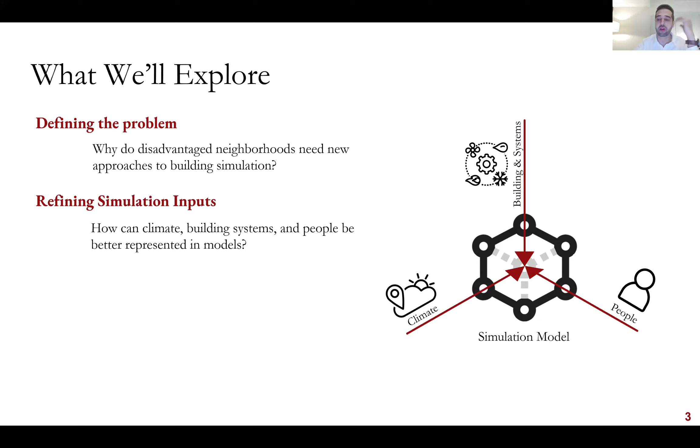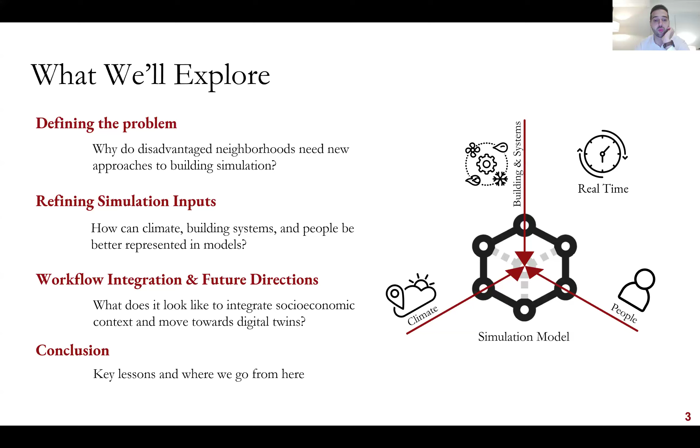But what are we going to be talking about today? We're going to first start off by defining the problem. Why do disadvantaged communities or neighborhoods need new approaches to building simulation? Then we'll talk about pathways for refining simulation inputs for those communities on the axes of climate, building systems, and people. We're going to be talking about how we can integrate different workflows and develop future directions for how we represent disadvantaged communities in simulation models. And finally, we're going to be concluding with key lessons and where we go from here.

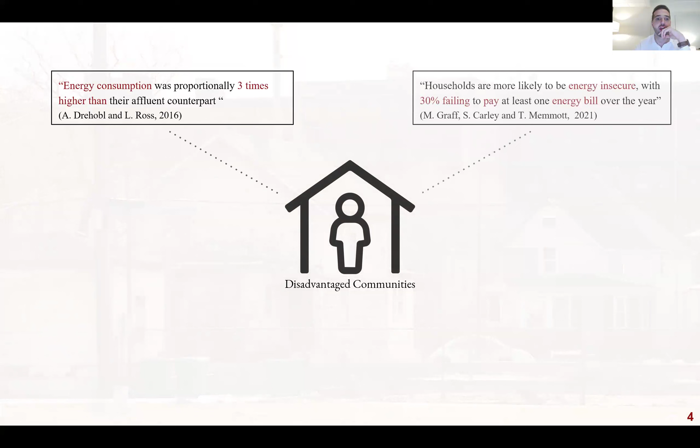So why do disadvantaged neighborhoods need a new approach to building simulation? While there's been significant work on improving energy efficiency in the built environment, specifically for households and residential structures, disadvantaged communities are currently in a worse situation. Energy consumption was proportionately 3 times higher than their affluent counterparts in those disadvantaged communities. Individuals were more likely to live in older, energy inefficient buildings. They're more likely to be energy insecure, and elevated electricity consumption was attributed to the design and construction of the households in which these disadvantaged communities live.

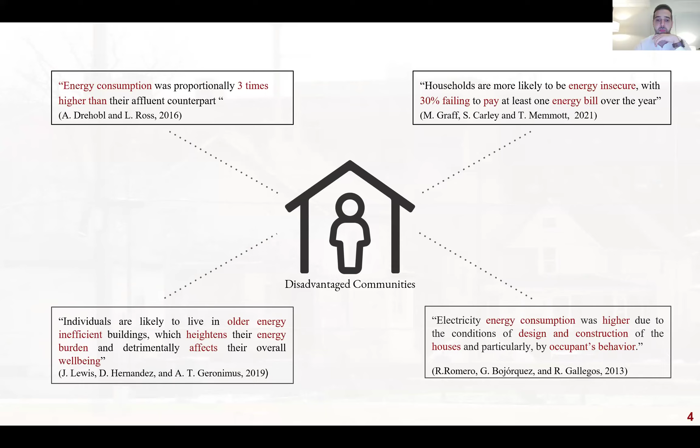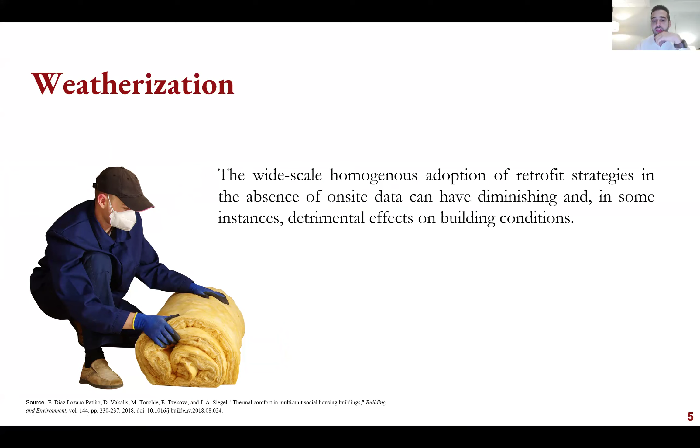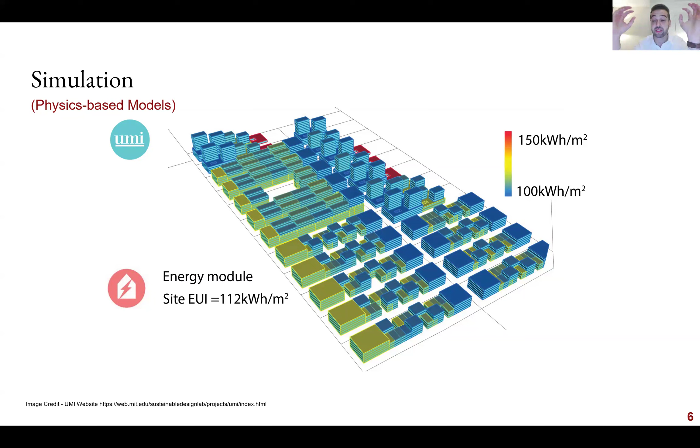And while weatherization becomes a tool for us to improve the energy efficiency of those communities, there's an issue that we face when we apply wide-scale adoption of those retrofit strategies in the absence of on-site data. As we have seen in the literature, such a homogeneous adoption of strategies can have diminishing and even in some instances detrimental effects on building condition. And this is where usually simulation comes in. Throughout this webinar, I'm going to be discussing more the applications for physics-based simulation models. They have a lot of applications in terms of analysis of energy consumption, optimization of system design, cost and life cycle assessment, and retrofit and renovation planning.

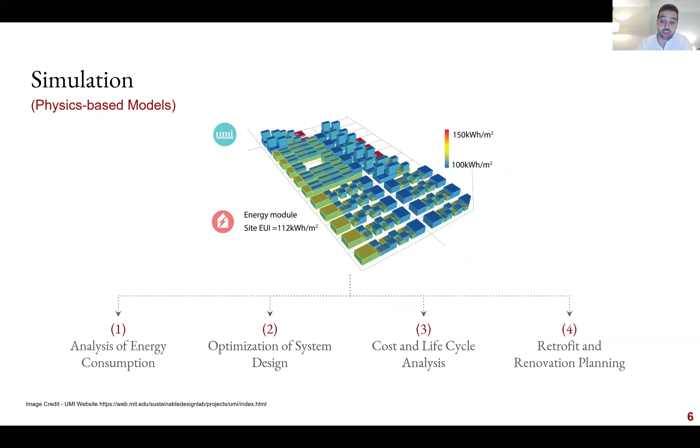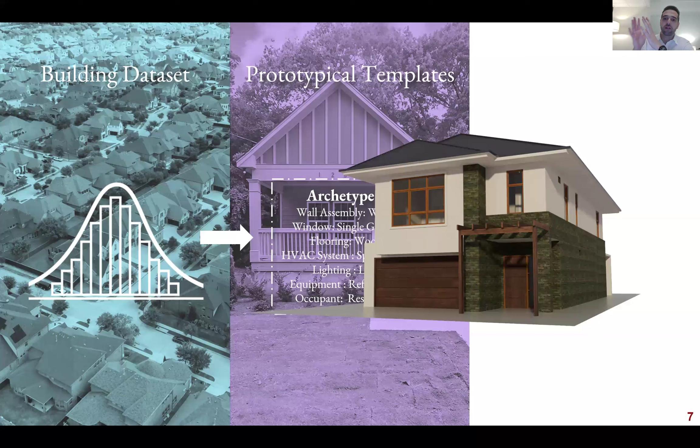And if we look at the typical process, we start off with a building data set. And from that building data set, we have a distribution of buildings with their specific characteristics. Now, in typical simulations, we start off with that data set and we start to build or construct prototypical templates. This could be for BEM or UBEM models. And these templates encompass a lot of information that we have about the building, things like the wall assembly, the windows, the flooring, HVAC systems, lighting equipment, etc. And then we feed that prototypical template into our simulation model.

But if we're looking at what the issue is with the disadvantaged communities, it is that while these prototypical templates are constructed based on the majority of the distribution, disadvantaged communities are the outliers of those distributions, meaning that the archetypes or templates that we do produce do not capture the characteristics of those homes quite accurately.

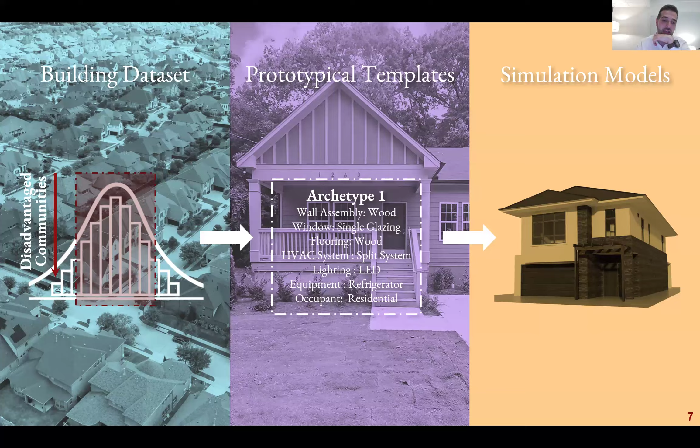And the results of this are that we can see up to a 92 kilowatt hour per meter square per year difference in EUI between simulated and actual energy consumption in some instances. So what this highlights is there's a need for us to carefully inspect the model fidelity in such instances. And model fidelity here represents the degree to which the model or simulation reproduces the state and behavior of the real world object.

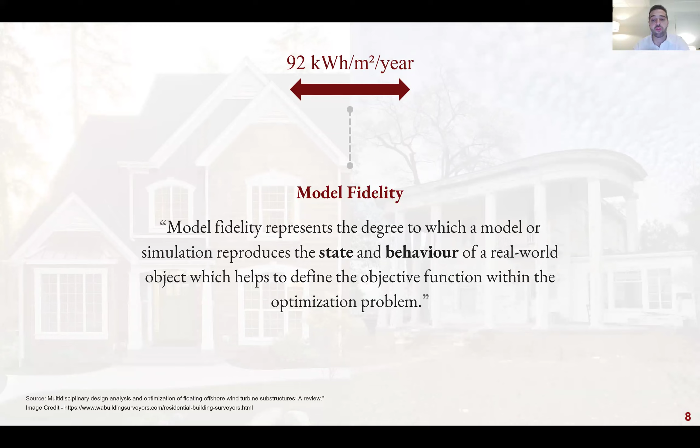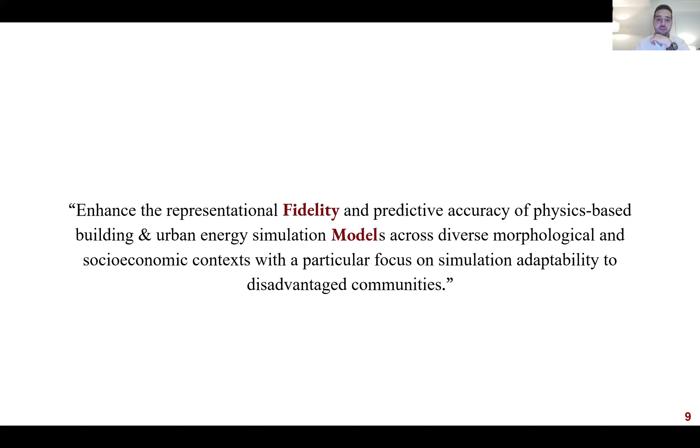So a clear objective that we need currently, specifically for disadvantaged communities, is for us to enhance the representational fidelity and predictive accuracy of physics-based building and urban energy simulation models, and specifically make sure that it is applicable across diverse morphological and socioeconomic contexts, with a particular focus on disadvantaged communities.

And in the field of architecture now, we've reached a state where we have a clear understanding of the boundaries of what it means to have inclusivity in architecture. And what this next step allows us to do is to move from inclusivity in architecture towards more inclusivity in building performance simulation. And what do we mean?

For this specific webinar, what we mean by inclusivity in building performance simulation involves the integration of diverse perspectives, needs, and conditions within the modeling of building systems and energy performance. And the key objective is that we want to ensure that the benefits we're seeing from things like simulation, from all of the tools, even advances in weatherization, become more equitably distributed to marginalized and underserved communities.

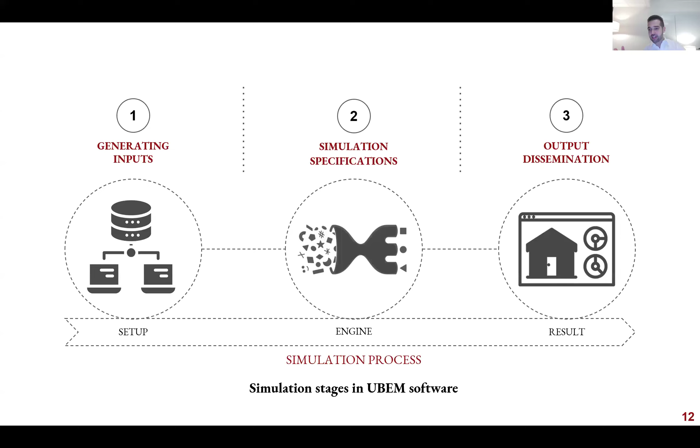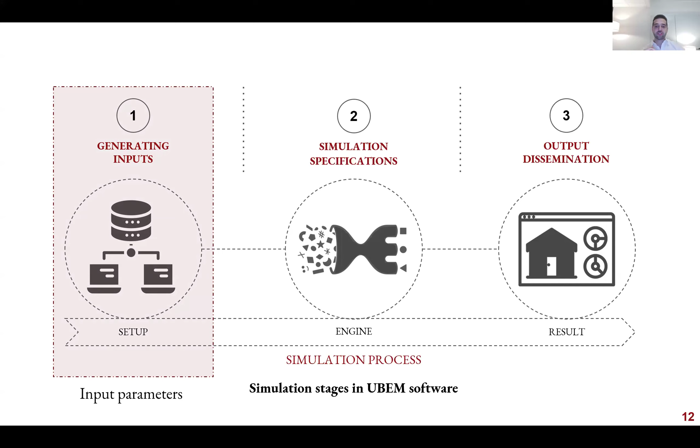So in terms of research questions that we all need to consider, first off, what are the key obstacles and challenges hindering the calibrated integration of disadvantaged communities into physics-based and urban energy simulation models? Secondly, throughout the simulation process, from the setup where we're generating the inputs, to the simulation specifications, to the outputs for a specific simulation run, we need to critically analyze the type of inputs that we're generating for the prototypical templates for these disadvantaged communities. So the second question could be, how can the simulation fidelity be enhanced to produce more representative outputs for BEM and UBEM simulations?

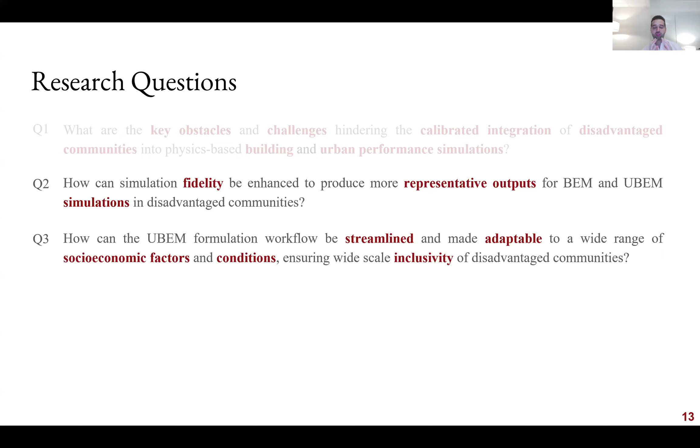And how can the formulation workflow be streamlined so that it becomes more adaptable to a wide variety of socioeconomic factors and conditions, meaning that we can apply the streamlined workflows in a lot more contexts?

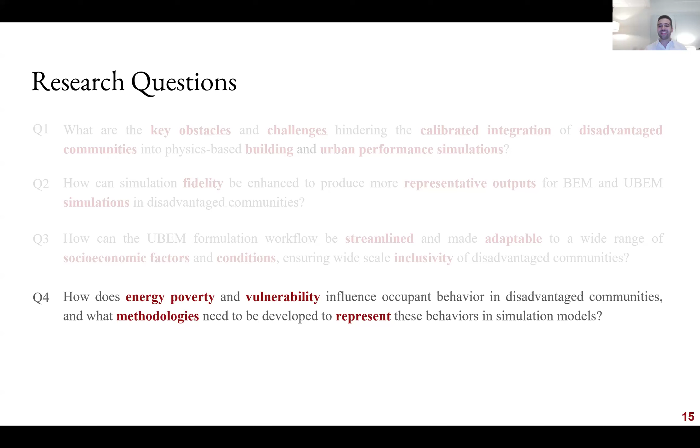One key thing that we have been missing right now in building performance simulation is the representation of the influence of socioeconomic factors on physics-based simulation models. Currently, there are a lot of instances in practice where we use a singular representation of occupant behavior. But a multifaceted occupant characterization is often required, specifically for disadvantaged communities. So here arises the question of how energy poverty and vulnerability could influence occupant behavior in disadvantaged communities, and what methodologies we need to develop to represent such behaviors in the future.

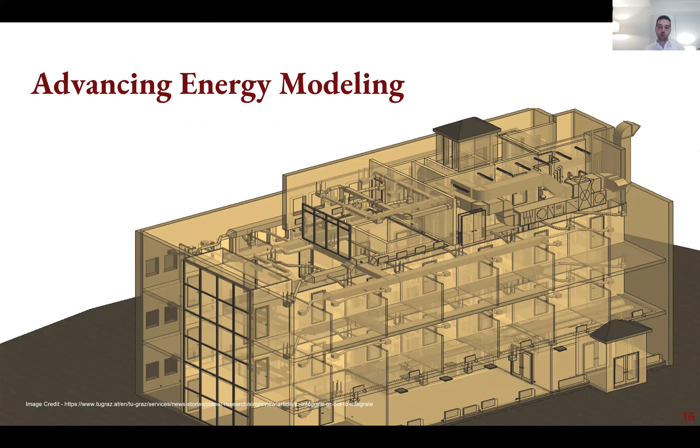And finally, if we're talking about equitably distributing the benefits of technological advancements for everyone, how can we use the forefront of what is being worked on, namely digital twins? How can we integrate current energy models for disadvantaged communities to work towards digital twinning, so we move from a snapshot model to more of a real-time updated model? So the last question would be, how can digital twinning approaches be developed to represent the unique energy and environmental challenges faced by disadvantaged communities?

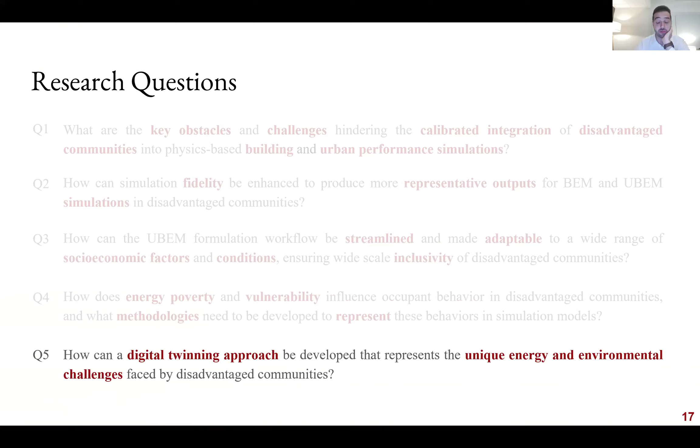So starting off, how can climate, building systems, and people better be represented in simulation models? First, to understand how they can be better represented, we need to talk about the current limitations of physics-based simulation models. Again, we talked about a large difference between simulated EUI and actual energy consumption, meaning there's a large disparity in simulation results.

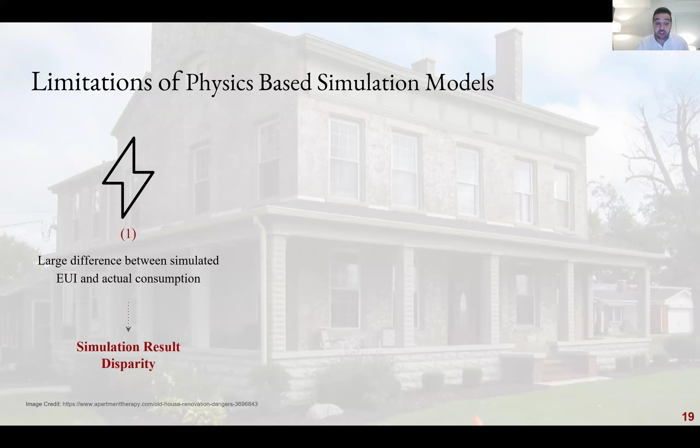We talked about a failure when applying the insights gained from energy simulation models into retrofits, the failure sometimes to improve energy consumption or thermal comfort, meaning that there's an ineffectiveness of retrofits backed by simulation inputs, which can also lead in some instances to compromised indoor air quality and mold growth.

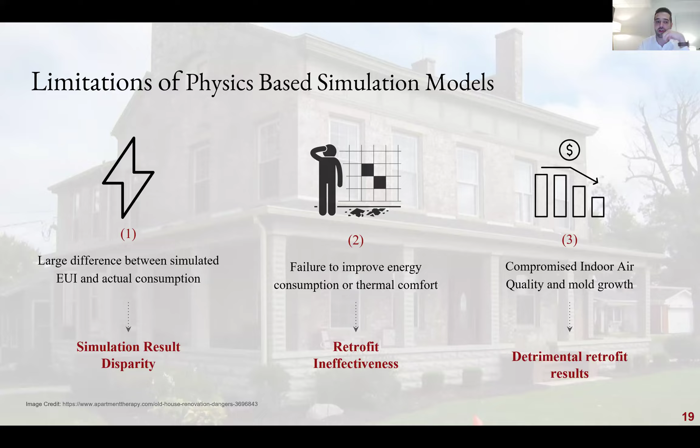So even in some instances, we can see detrimental retrofit results. And again, this all ties to what we talked about before, that outlier conditions for disadvantaged communities make their representation in building performance simulation much trickier than usual.

So if we're talking about the key things that influence those outlier conditions, first we have external environmental forces. So we can see, for example, temperature differences in the microclimate that we need to capture, elevated occupant density in certain instances, proximity to mobile and stationary sources. Things like that can, of course, affect pollutant concentrations, amongst others. So all of these are external factors that we need to incorporate into the simulation models in terms of being an outlier.

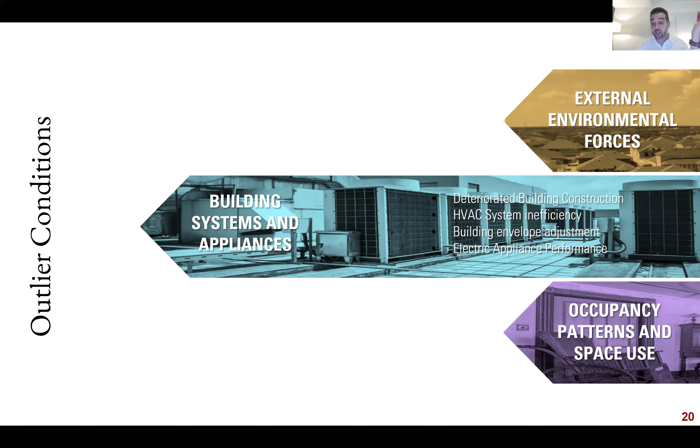When we're talking about building systems and appliances, for example, we can see things like deteriorated building construction assemblies, HVAC system inefficiencies, like very old-fashioned split units that are very bad in terms of efficiency, for example. We can see that we need to adjust the building envelope. We can see issues with electric appliance performance that we need to address.

Building construction assemblies and the state of the envelope could be captured, for example, through thermal imaging to support that. And finally, at the core of what we need to do is how do we represent occupancy patterns and space use? How do we incorporate things like socioeconomic factors into the occupant limitations and behaviors as a reflection of those limitations?

So all of the three axes that we talked about, namely weather and external climatic conditions, building systems and appliances, and then people, highlight the need to localize simulation input specifically for disadvantaged communities, because they lie more at the outlier conditions, so they're not easily represented through the prototypical templates that we have.

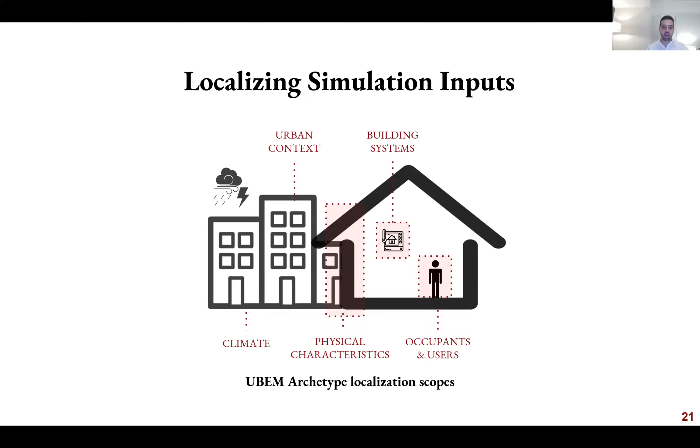So how can we start to approach that localization? We can start, for example, by leveraging existing data repositories. As we know, with the Internet of Things, we're having an exponential growth in household data sets describing building conditions, energy consumption, and weather conditions, amongst others. So we need to leverage these existing repositories to feed into our simulation models.

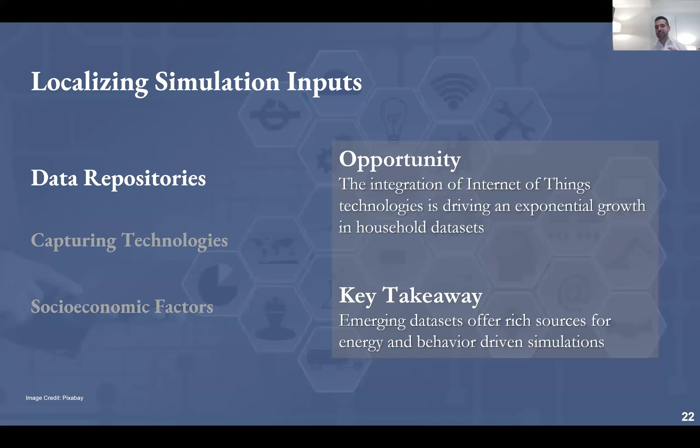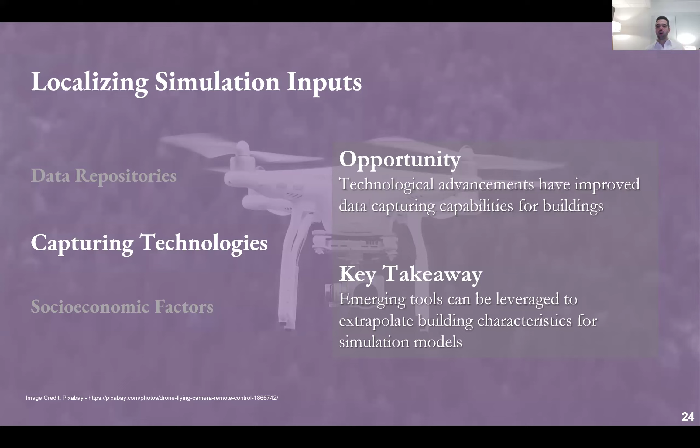In instances where we don't have existing data, and this happens a lot for disadvantaged communities, because the majority of the data we have is for more affluent communities, how can we leverage data capturing technologies? There have been a lot of technological advancements over the past decade. So how can we capture existing conditions as is, rather than relying on prototypical templates?

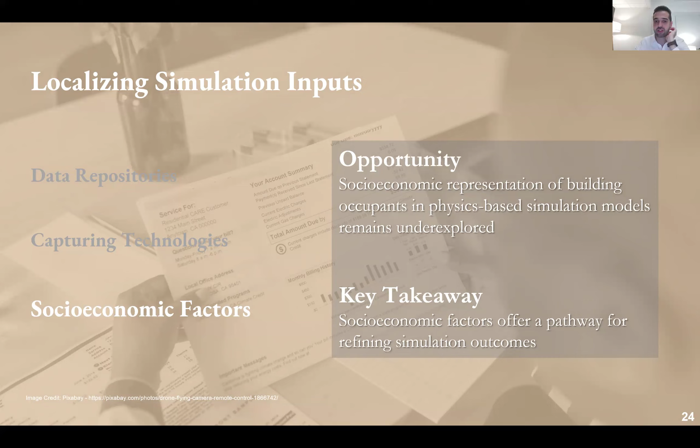And finally, how do we incorporate socioeconomic inputs in building simulation models? How do we represent socioeconomic factors in building simulations? So if we start off with examples at the climate, building and systems, and people scale, starting with climate, what would be a challenge that we could see when we're trying to represent climates in building performance simulations?

If we're doing a prototypical simulation, we start with either a TMY, typical meteorological year, an AMY, actual meteorological year, or an extreme meteorological year, and we feed that into EnergyPlus simulation software. But the challenge with these three is that they often lack spatial proximity to where we're trying to conduct the simulation.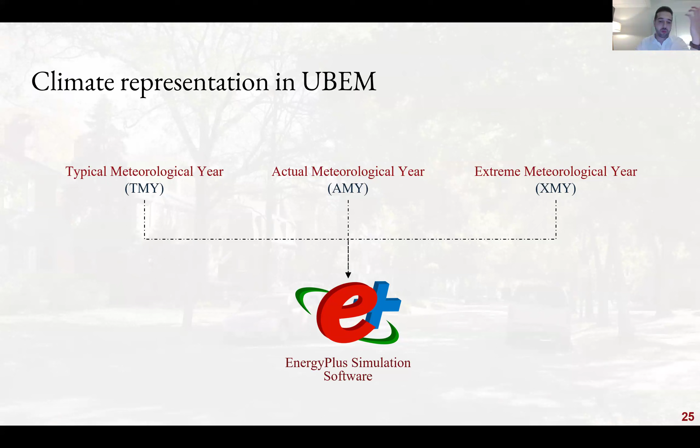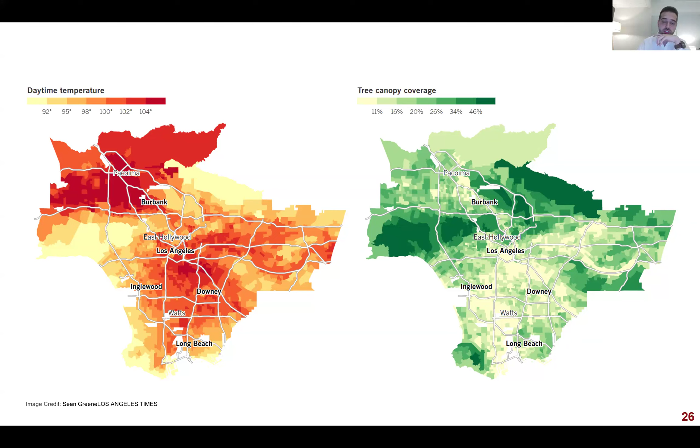So to just use TMY or AMY data captured from a weather station far removed from where the community lives can misrepresent the actual temperature conditions at that particular location. So we see residents having to use more applied ways of managing those microclimate conditions and trying to reduce their feeling of extreme heat in these instances.

So how do we start to develop ways of capturing the microclimate in building performance simulation? This becomes a key challenge that we need to start thinking about and start making more streamlined. In this case, one example that we did through our own research is that we started to think about the idea of localizing weather file creation for a select community.

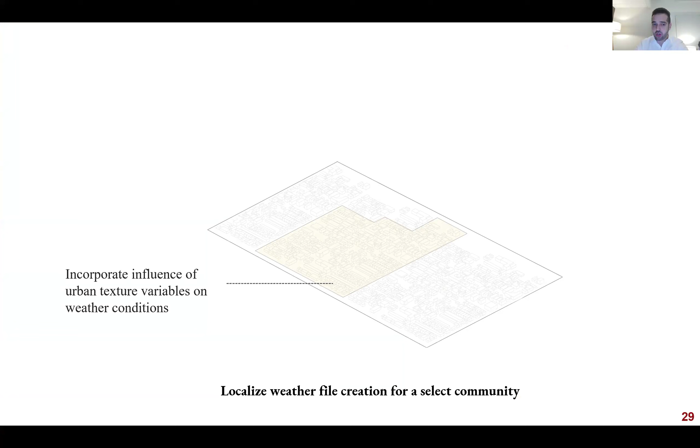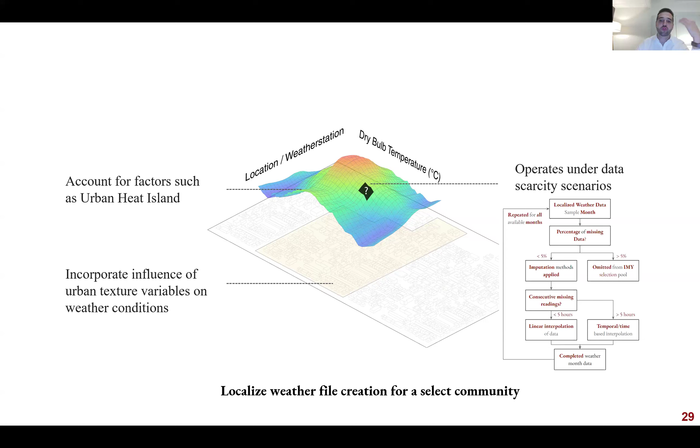So what we aim to do is to have a file that incorporates the influences of things like urban texture variables, accounts for things such as the urban heat island effect, and most importantly operates under a data scarcity scenario, meaning that in the lack of data, we're able to impute information to keep the simulation going. And what we advocated for is the production of an inclusive meteorological year weather file.

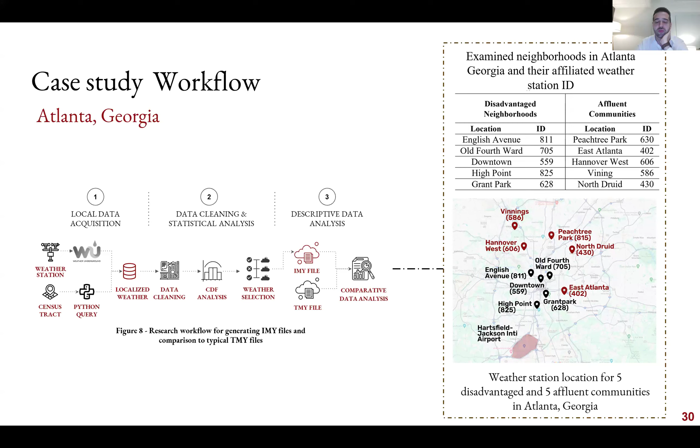Specifically, I'm going to talk briefly about the case study that we had for Atlanta, Georgia. What we wanted to showcase is that existing repositories, such as the Weather Underground repository that has hundreds of thousands of weather stations across the US, can be leveraged to produce more tailored EPW files, or inclusive meteorological year weather files, for those disadvantaged communities. And we show that by doing that, we can get a better sense of the temperature profile for disadvantaged communities in comparison to TMY or AMY, for example.

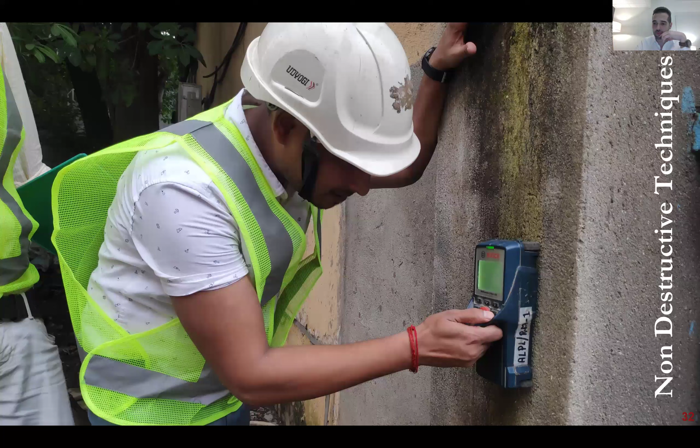Okay, moving from climate conditions, a second axis that is very important to consider is core buildings and systems. So there's a need, and of course this is important for our simulation models, to accurately represent the envelope conditions, for example. So how do we approach buildings where it's more difficult to estimate the envelope conditions on site? Here, what we should consider are non-destructive techniques for extrapolating this data as a first layer.

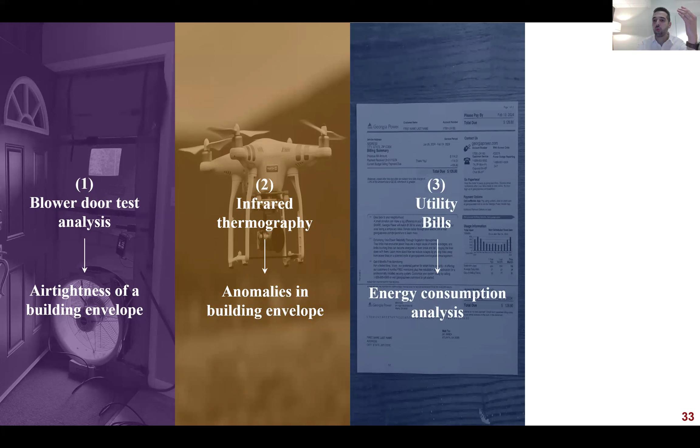And we need to evaluate different ways in which we can capture that critical information for those communities. So we can use things like blower door test analysis to get the air tightness. We can leverage things like infrared thermography with drones to capture anomalies in the building envelope and better characterize the performance of the envelope. We can even link with utility bills or data, if we do have them, to calibrate the model.

And even surveys and interviews, because the residents themselves, of course, have a great understanding of how their space is operating. So even discussions with them in terms of surveys and interviews can provide great insights in those instances.

And what we wanted to show through one instance is how we can use emerging technologies such as thermal imaging with drones to rapidly capture and characterize existing building conditions for those communities. So through one research paper, we looked at pre-retrofit analysis for identifying the areas that need to be weatherized or where intervention is needed. And then post-retrofit, we were able to analyze whether those interventions were successful or not.

So this gives us a way to immediately give feedback to the people doing the intervention and then, post-intervention, evaluate the effectiveness. So there's a need to leverage these emerging technologies to accurately capture building characteristics.

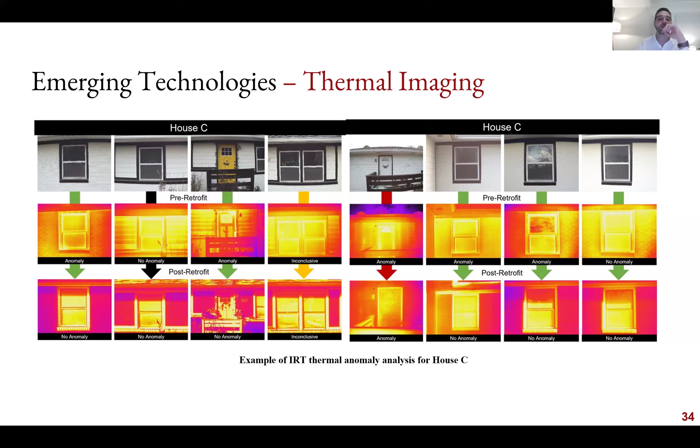And finally, and most importantly, people: how we represent people in building performance simulation, specifically for disadvantaged communities, is critically important. As we talked about before, currently in most instances in practice there's a singular representation, but we need to move more towards a multifaceted occupant characterization if we want a better representation of occupants in those simulation models. And you might ask yourself, what's the issue between not having an accurate representation of occupants or having one?

The issue is often that if we're looking at simulated consumption using a prototypical template and then actual energy consumption on site, we can see that socioeconomic factors, for example education, employment, and income, can significantly change and create a distinct difference between simulated consumption and actual energy consumption on site.

So for us to move towards a better representation of occupants, specifically in both BPS and UBEM, there is a need to start off by looking at the physics-based simulation model and then calibrating the deterministic simulation inputs. So for example, with lighting loads, if we know exactly what type of lighting is being used in those residential homes, we can start to extrapolate those inputs.

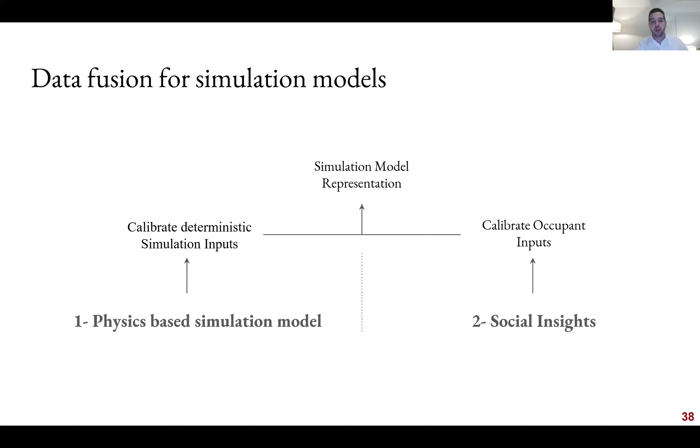But for us to go on this endeavor, this of course has to be sort of supported by a layer of deep social engagement. And again, if we're talking about social insights, these type of deep social engagements need to take shape in the form of discussions and forums with the residents. There are more that could provide us both insights and help us also move the simulation work that we're doing into practicality through applying some of the things that we do suggest if they find it or deem it fit.

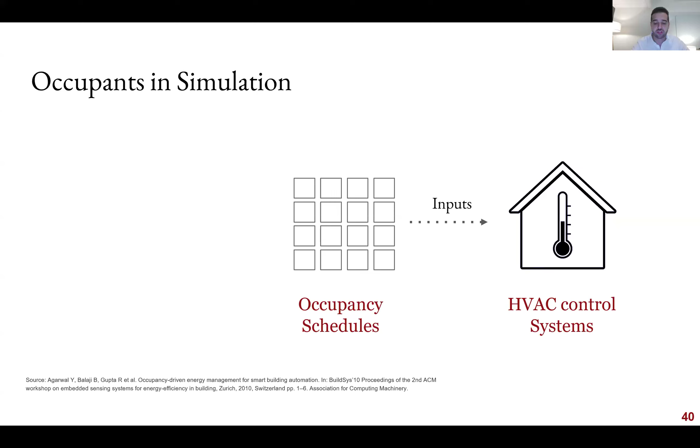So if we're talking about, for example, simulations and how to represent occupants in simulations, usually the prototypical thing, for example, and an issue we see in building performance simulations at the moment is we start off with an occupancy schedule that sort of prototypically feeds into the HVAC control systems and in our case feeds into the simulation model. But we fail sometimes to incorporate how things like restrictions or limitations on incomes can significantly affect the operation of HVAC systems, even with, in retrospect, of course, the occupancy schedules that we have.

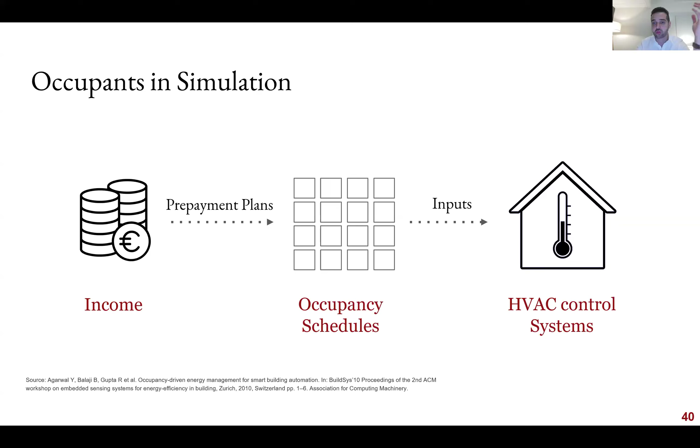So, for example, if we look at prepayment plans, a lot of households that are in disadvantaged communities are enrolled in prepayment plans, which means that homogeneous adoption of HVAC system throughout the year is not applicable for them because they have, of course, income limitations. So the question then becomes, how do we incorporate such socioeconomic factors to better also represent actual behavior of simulations in those conditions?

So as an example of a research project that we worked on, we looked at a neighborhood in Atlanta, Georgia, in which the majority of residents, over 70% of residents, had enrolled in a prepayment plan. And we looked at what the simulated energy profile looked like throughout the year against what their prepayment plan limit was, in respect to households in good and in poor conditions.

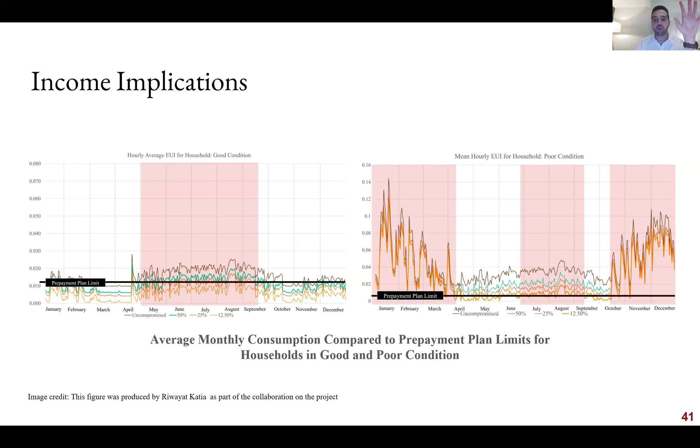And just as a reflection, if we're looking here, these represent the prepayment plan limits. We saw that the simulated energy consumption, assuming, of course, continuous operation of HVAC systems throughout the year, often lay above what the prepayment plan limit was, meaning that the simulation assumes that the HVAC operation is going to be continuous, but in reality, those households face discontinuities in service or opted to completely alter their own behavior in their households in order to stay under that prepayment plan limit. Meaning in instances where we just apply it homogeneously, we are not able to capture what the actual energy behavior is for those households.

And if we're looking at instances, for example, where we're even modeling things like thermal comfort, if we're again assuming a continuous operation of HVAC system throughout the year, we see that of course households between different conditions would have a similar indoor air temperature. But if we consider things like financial limitations, we see that households, let's say, for example, in poor conditions, reach that financial limitation much quicker.

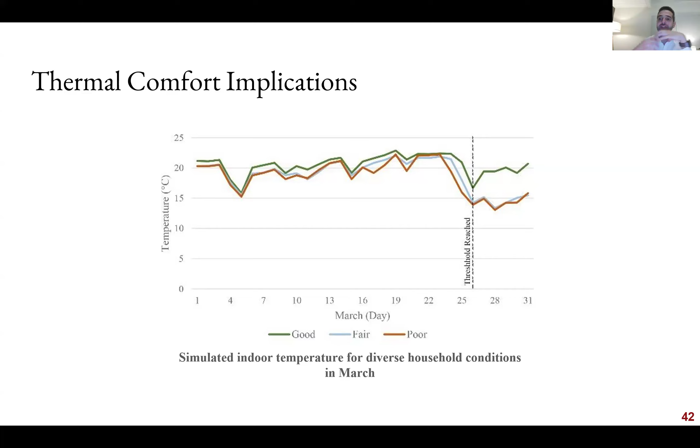And accordingly, if we talk about discontinuing HVAC system operation for a majority of the month or a portion of the month even, it means that it has drastic thermal comfort implications for those households. So here, this is more of an example of how incorporating one socioeconomic factor, such as financial limitations, could or should significantly influence how we see those simulations or interpret the results of those simulations.

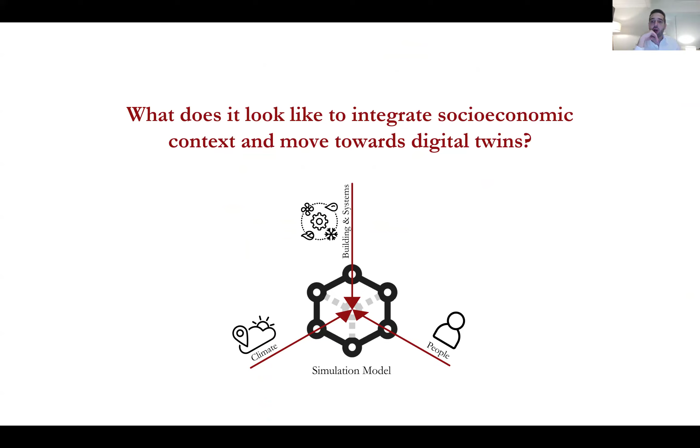So what does it look like for us to sort of integrate socioeconomic context and then looking into the future? How can we move towards things like digital twins, for example? So what we sort of advocate, and what the title of this webinar is, is the idea of trying to work towards inclusive building energy models and urban building energy models. And these need to be grounded in localization of simulation inputs for us to gain better fidelity in terms of the simulation outputs, of course.

So it needs to start off first by the unit. We need to start off by localizing and critically analyzing how we can get and formulate the archetypes for those communities, for example. So how can we get things like construction assemblies through technologies that we were discussing? How can we extrapolate lighting and equipment power densities, for example, through surveys that we can do with the residents or through any data capturing methods?

How can we calibrate the occupancy and people representation that I was talking about before for us to incorporate things like socioeconomic influences and how those should be represented in those occupancy schedules at the unit scale?

And then moving from the unit scale, we can start to look at the building scale, for example. How do we understand some sort of information or link that to information? And in this instance, of course, I'm talking about UBEM models. So how can we link an understanding and quickly generate what the building footprint is, what the height is, what the window to wall ratio is, and then how can we assign the different archetypes for the buildings in a neighborhood?

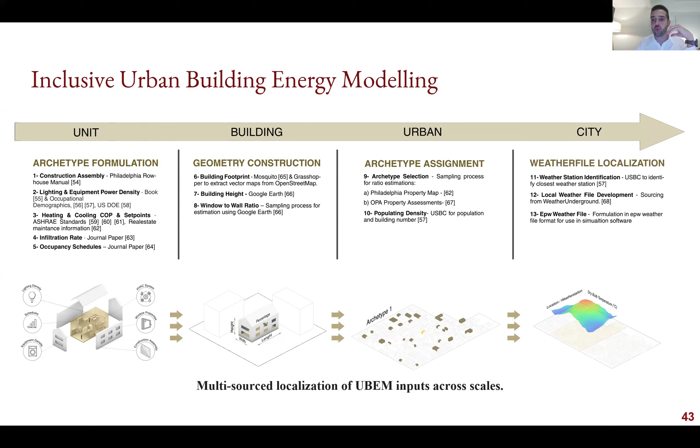So for example, we talked before about, let's say, vegetation. Vegetation coverage, when we talked about tree canopy and things like that, definitely impacts the temperature conditions on site. So how do we incorporate that into our simulation models?

And then, not finally, but a next step would be: we have all of this information that we're generating or localizing. Of course, it's going to be geometric, semantic, and consumption. But how do we link that to real or near real-time data for data analysis and scenario predictions, if we're going to be moving from a snapshot of building performance towards digital twins, as we're moving towards now in the building performance simulation community?

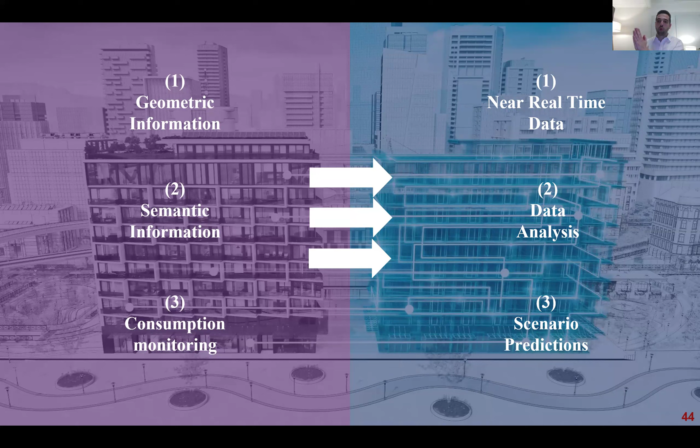So how can we start to give insights in real time, for example, to residents about what their current performance is, what their current building characteristics are, and accordingly, what the implications of doing certain interventions would be? Because the goal in the end, of course, is to try to improve the conditions for those households.

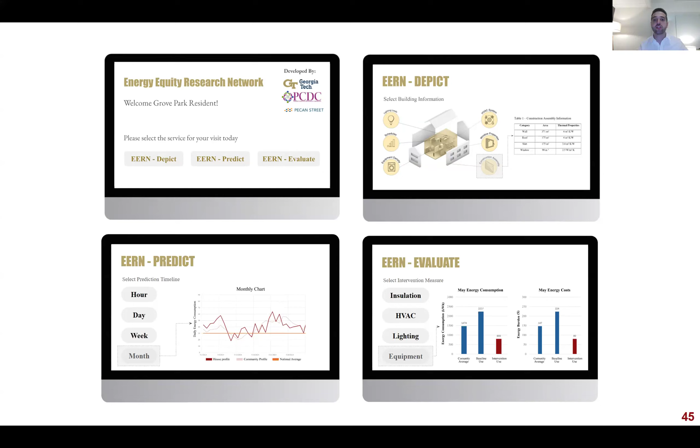So what would be the key findings or lessons that we wanted to discuss today? One key lesson, again, we highlighted this before, is that we have been exposed a lot to inclusivity in architecture, but we need to now also start to consider inclusivity in building performance simulation. Namely, because we want the implications of the simulations and the analysis that we're doing to have a beneficial impact for those communities.

And we want an equitable distribution of those beneficial interventions that we do across communities, across socioeconomic classes that we're targeting in this case. And secondly, we talked about the idea of input calibration. We need to think critically about pathways where we can start calibrating the input specifically for disadvantaged communities.

And we talked about how we can do that for things like climate, building and systems, and people, using technological advancements, existing data repositories, or even questionnaires, and specifically interactions and the better representation of occupants in building performance simulation. But this is a starting point where we can start to improve the fidelity of simulation models.

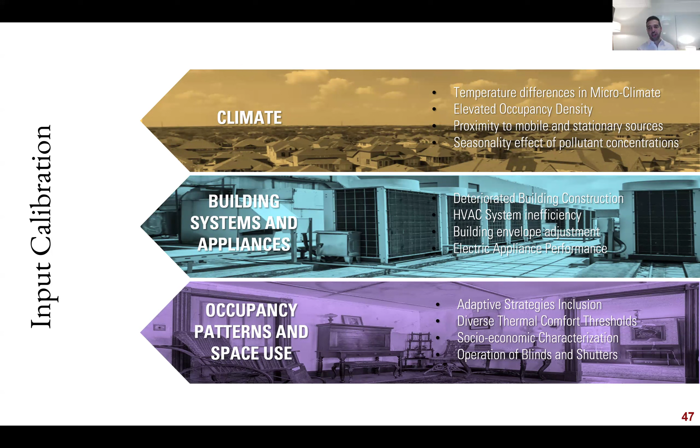And it's important to understand that improving the fidelity of simulation models would have a larger benefit for disadvantaged communities. But of course, improving the fidelity also holds benefits for all simulations that we produce on a regular basis. And the goal in this case is to bring this number down. We highlighted at the beginning of the talk that currently 30% of disadvantaged households fail to pay at least one energy bill throughout the year, meaning that there's a lot of

beneficiaries for whom we need to do interventions to improve building conditions, to reduce their energy poverty, and to improve living standards for those communities. So we need to bring this number down for those communities. And the way to do that would be to apply conscious simulation models that are able to incorporate localized inputs that are more representative of the actual conditions on site for those households. So we can apply weatherization based on those simulations and improve conditions in those households.

And again, the idea of localizing or improving simulation fidelity has a ripple effect: it not only, of course, improves conditions specifically for disadvantaged communities, but it can also help researchers, policymakers, affluent communities, industry, and software developers. This would be something that could improve the current fidelity of simulation models for a lot of stakeholders in our process.